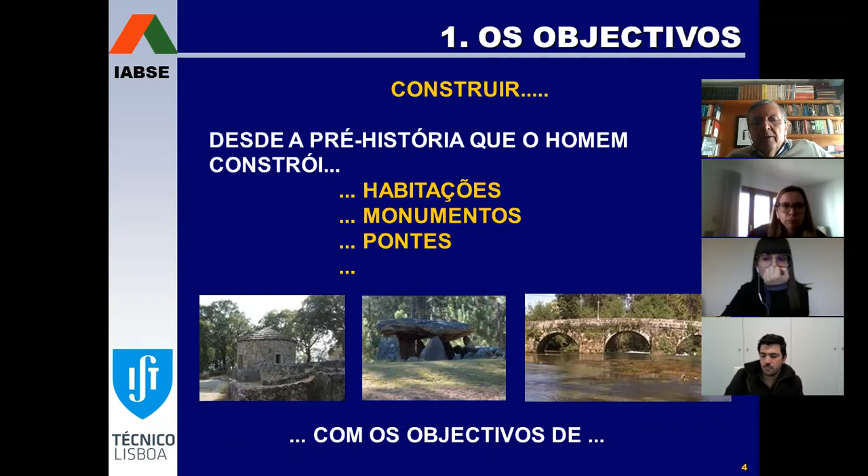All these things have, and it is important to have this concept, a target. When we do buildings, the target is to protect the persons, the family, from the environment. When we do bridges, the objective is to pass an obstacle, to pass a river or something like that.

We build roads to facilitate the movement of the persons. So the functional aspect of all our constructions is always the goal of the constructions.

Of course, to achieve these functional results, we need to have safe constructions. And what it means safe, it's buildings that can support the force of the winds, of the seisms, bridges that can support the loads that pass there. So the constructions need to be safe.

And besides that, they need to be durable. We like to have constructions that do not degrade with time. We need roads that support erosion, or monuments that are used and stay for eternity. So we already have these three main goals of construction: functionality, safety, and durability.

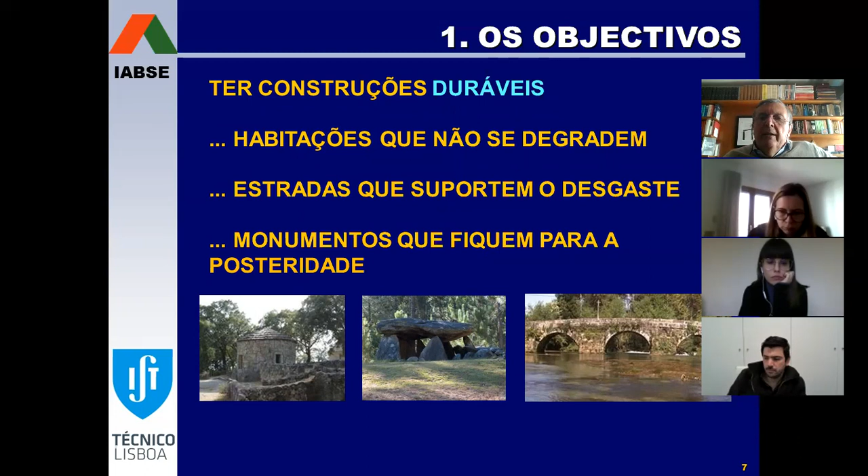And these are the main goals that we have since the beginning of construction. So how did we do this first construction? At the beginning, we only had basically three materials: the soil, basically the clay that was used in construction, the stone, and the wood, timber. And with these three materials, we built everything that was built until the 18th century.

Let's see a little bit more in detail. So soil or earth is the cheapest material that we have. It is a material that the strength is not very high, but it allows very easily to build in the form of compact earth or with bricks of earth.

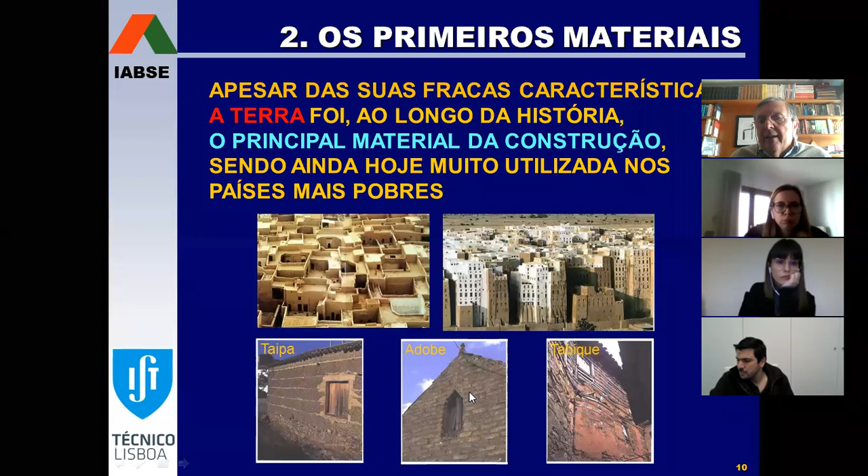And we can find it even today in different regions of the world, construction with earth. You see here buildings with several floors built with earth. What is the main characteristic of these constructions? The main characteristic is these constructions appear in places very dry, typical desert situations. Why? Because earth constructions with water, they disappear, they melt. So we can see these constructions only in dry countries. Even in Portugal, we only have this type of construction in the south of Portugal, mainly Alentejo, because it's the driest part of our country.

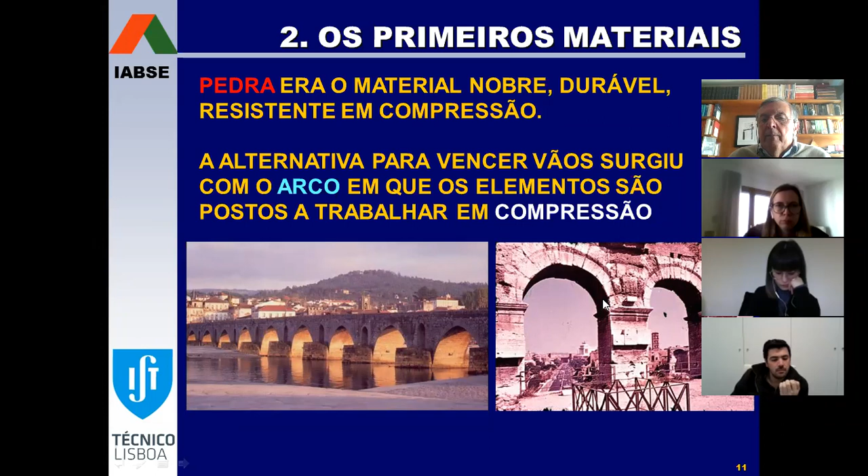Stone is, as I can say, a kind of better soil. Stone is a material with much higher strength, but it has a problem: in terms of tensile stresses it is weak. We can compress stone very strongly, but if we apply a tensile stress, it breaks very easily. So stone was used mostly in monuments because it's very durable, but until the arch solution was invented, stone was not so much used, because if you make a beam of stone, it more easily breaks.

Besides that, wood, I would say, was a material that was very much used, especially in the Eastern world, Asia and so on, but also in Europe. Contrary to stone or earth, wood works well in compression and in tensile stresses, so it was mostly used to make beams. It was, I would say, the most common material that was used in construction.

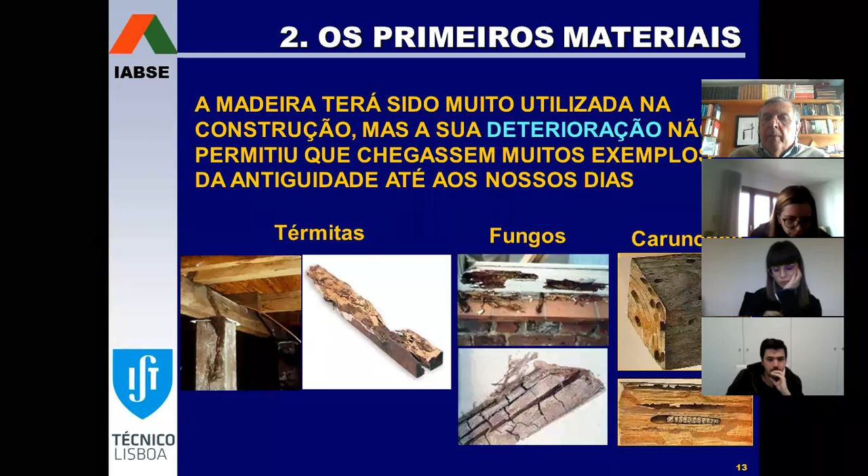Unfortunately, wood has severe deterioration problems related to insects, fungi, or even water. Water degrades wood very much. So most of the construction that was built with wood disappeared, and the old construction did not reach our present days. So now you know the objectives of construction, you know the materials that were used in the beginning, and now let us see the real constructions.

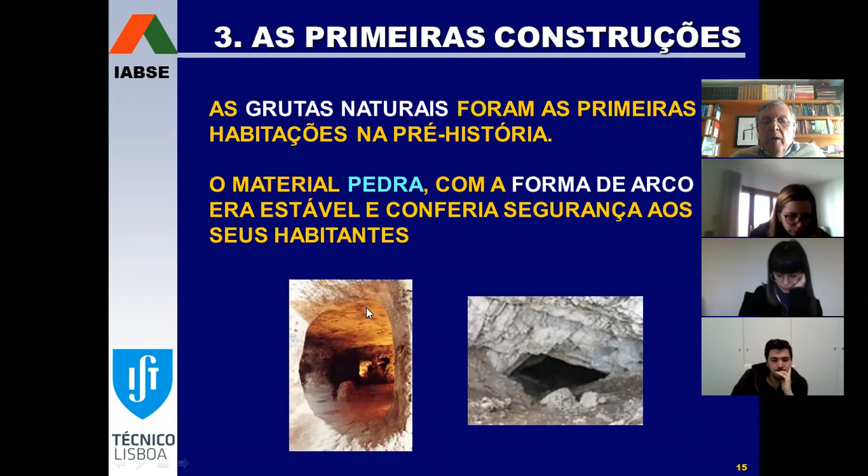The first constructions that appear are not real constructions, but caves. The caves were used, natural caves, so they are not really a construction of the human being. They were used to protect, as it was the easiest way to be protected from the environment. It was the utilization of caves, mostly in stone.

But the first building, or the oldest building that is known, was built in 9000 before Christ. It exists in the south of Turkey today. It's a special building because it's a temple. We are speaking of a period where human beings had no agriculture yet. Human beings lived mostly by hunting animals, and this concept of temple appears.

So the first constructions that we are aware of are basically temples. You see that the material used was stone, with elements related to the religion associated to that temple. As it was built in stone, we can still see it today, mostly 11,000 years after that.

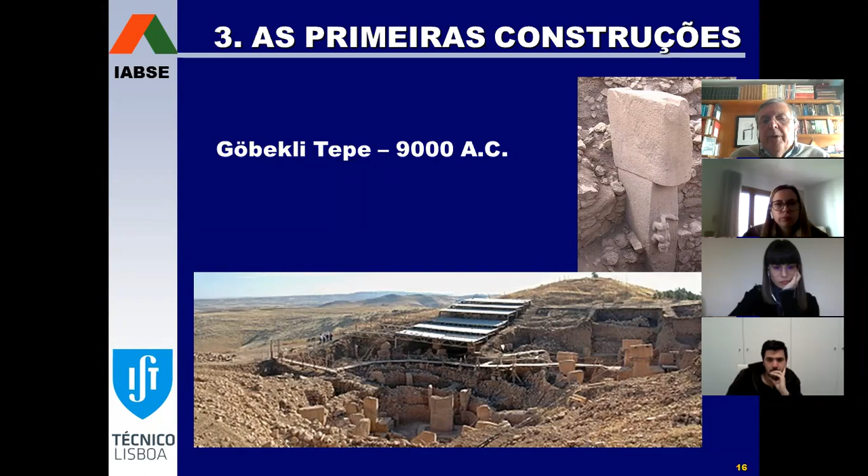9,000, yeah, 11,000 years. After this period appeared agriculture. Agriculture appeared around 4,000 years. So you see a difference between 9,000 and 4,000 - it's a lot of time.

And with agriculture appeared the concept of city or town. One of the oldest towns known is Uruk in Sumeria, present-day Iraq. We think that associated with the temples, in some places with the development of agriculture, people began to settle. It was easier to do agriculture than to run behind animals to hunt them, and people began to settle.

The appearance of a town or a city is quite a new concept, because in the period before, each family or each hunter had to do everything and find food for his family. When the town or city appears, we begin to see specialized professions. We have the shoemaker who just makes shoes, but he can exchange shoes for food. We have a group of people, each with their own profession, and the professions exchange materials, and all can survive.

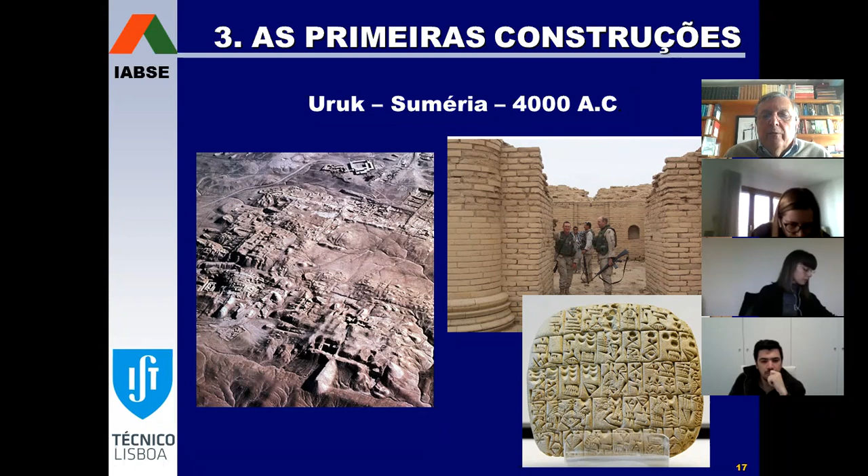Now, today they have special problems. As you know, Iraq is not a stable country, and unfortunately, these places are not easy to visit. It seems that the Pope is going there in the next days.

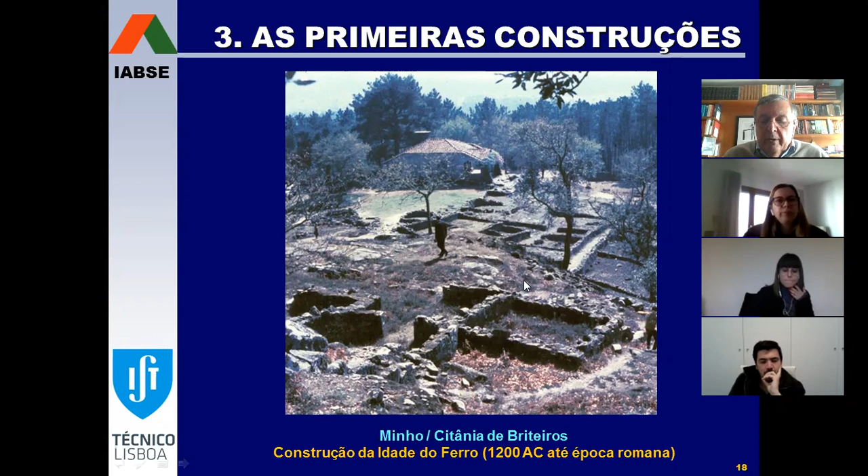So basically, with the appearance of towns or cities, the buildings, the small houses, were mostly built with stones in the walls. But when you reach the ceiling or the roof, you have to put beams, and for the beams you have to use wood. That's why mostly of these old constructions we only have walls, because they are in stone - the roofs disappeared. They were in wood, and with time they just disappeared.

The first civilization, a real civilization with a king power or a pharaoh power, is Egypt. If you think of Egypt, mostly you think of the pyramids. The pyramids are the tombs of the pharaoh kings. It's funny because the evolution of the pyramids involves the solution of some engineering problems. The first pyramid...

Let us say the step pyramid is the Saqqara pyramid, built by the pharaoh Djoser. It was a step pyramid - as you see here, it has several steps. Before this, typically the tombs were just a parallelepipedic tomb close to the soil. This pharaoh decided to make a bigger one, step by step.

The next pharaoh was Snefru. He decided to make a more uniform pyramid, and instead of steps, he tried to make a uniform pyramid. But he began, as you see here, building with this inclination, and suddenly he had a rupture of the foundations. Because, as you know, when you are at the beach with sand and try to make a small mound with sand, you know that the inclination has a maximum related to the friction of the soil grains, of sand grains.

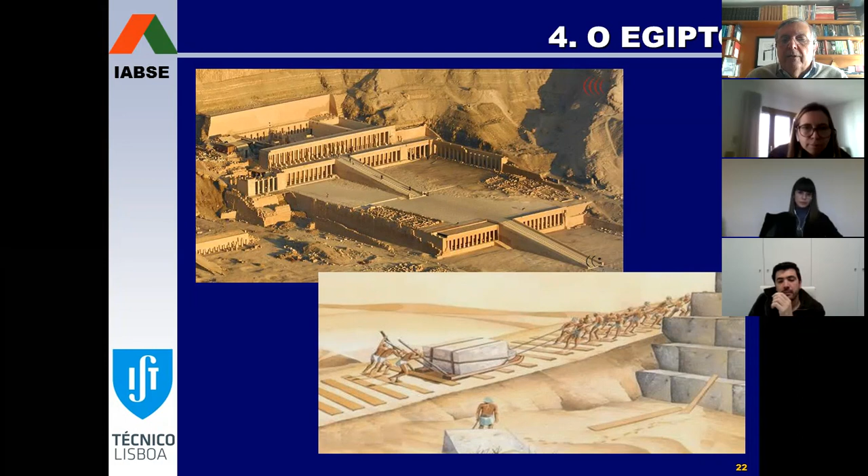The Egyptians that left all their temples, the temples that you know from Egypt, are of course all built in stone because it's a durable material, and they understood that. But as they did not use the arch for the temples, they used beams. You can see here that the beams were at a very small span. Compare the height of this guy, so this beam has a 2-3 meter span, because they knew that if the span was too large, the stone would not support it and the beam would break.

They also invented the columns. The columns, as you see, are built with several segments for construction, because it was impossible to place an element like this together all at once, so they placed it one over the other. At the end, they used these capitals that were very large, mostly because the beams that were used were very large. They also understood the problem with the soil, because the pressure of the column was higher.

And the pressure in the soil should be reduced. To reduce it, they enlarged these elements, so the force divided by a greater area reduced the stress in the soil. And so foundations were invented also by the Egyptians. Basically, in Egypt appear the basic elements of construction.

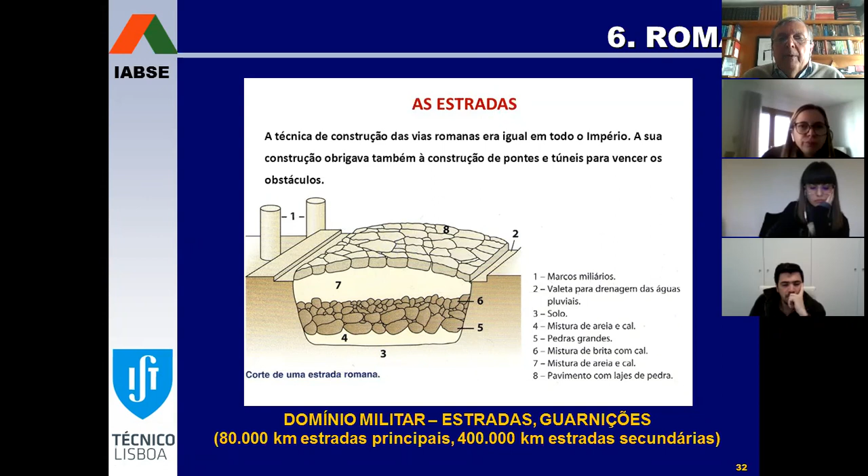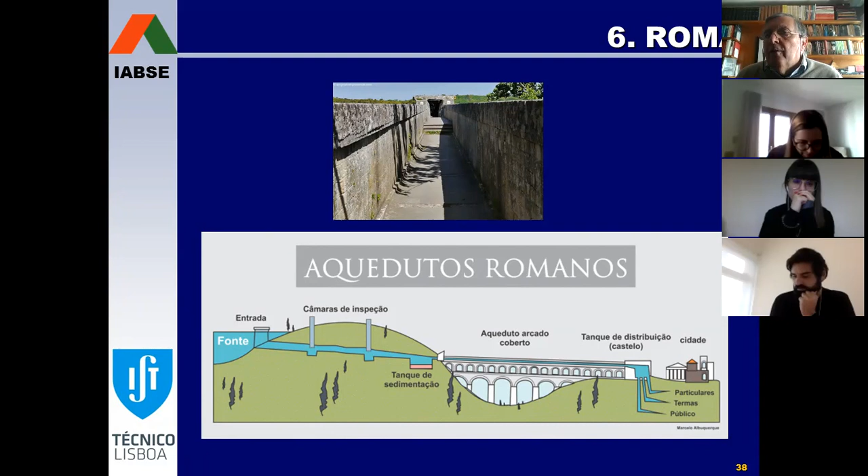In the towns they had pipes, lead pipes that were used for instance for gardens and even some houses. Lead is poison for people, and people taking in lead can become crazy. One theory associates the end of the Roman Empire with the existence of lead in the water supply. This theory arises because in corpses found in Pompeii, they found an elevated level of lead in the dead people there.

Another construction element from this time is the dome. The Romans were the first people to build a dome, and the dome is a more innovative construction than the arc, because in the dome you have a 3D composition of the elements. Remember that in an arc, when you build it, each stone has a smaller length on the interior part than the exterior part.

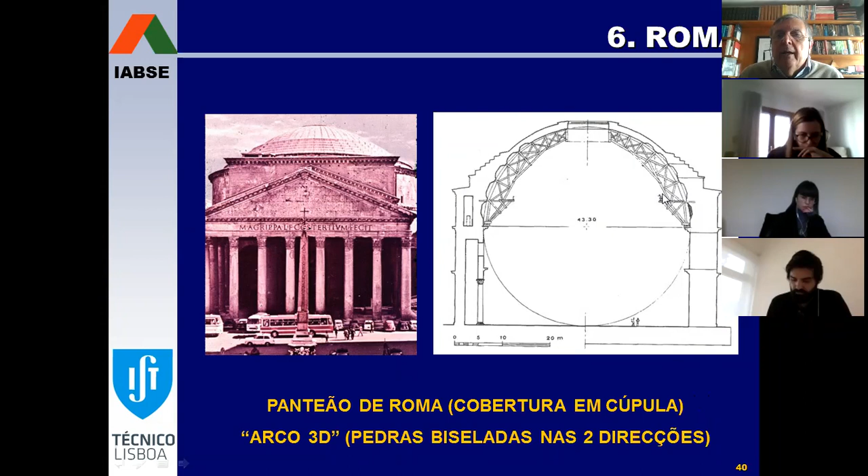In the dome, you have to do that in two dimensions, in the perimetral and in the longitudinal directions, so that they can all fit together. That is the problem of all these stones. But they were all glued with the mortar that they made, and you can still see this dome today in Rome. That is a magnificent construction.

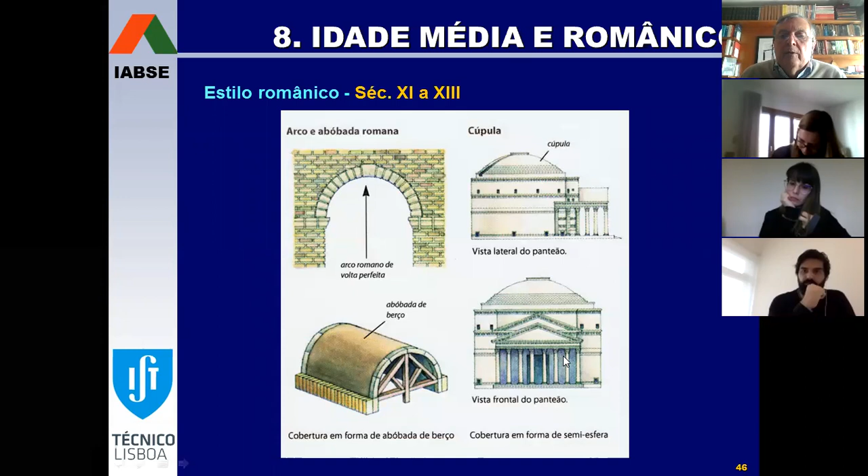So we have the typical spherical dome for the Muslims, and we have a medieval dome, a cylindrical one, in the Christian Western Middle Age. Basically, you see the typical Roman arc with that small support that led to the cylindrical dome used in the West, and the spherical dome later used mostly by the Muslim religion. After that, in terms of evolution, we reach around the 14th, 15th century the Gothic construction.

The Gothic construction is an evolution of the Romanic style.

Going back to see this construction, it's called the Romanic style. In this style, the arc, due to the pressure from above, exerts a horizontal force that tends to open the arc. To avoid this, the walls in these churches were very thick and strong, to absorb the impulse from the arcs above. That's why Romanic churches are very dark and don't have windows—adding windows would reduce the weight-bearing capacity of the walls, which needed to be thick to absorb those forces.

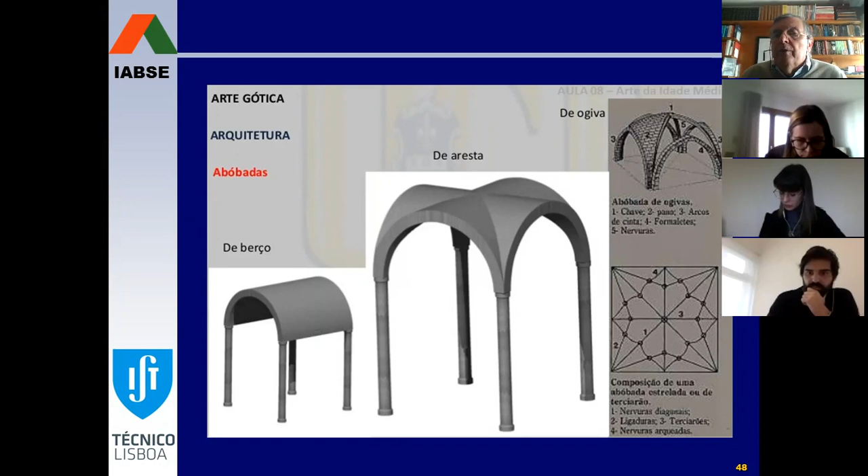When we reached the Gothic style, the conception was different. The dome was supported by small arc beams, and these small arc beams would lead the forces into columns. Also, the Gothic arc, instead of being circular like the Roman arc, has a height bigger than its width, so the forces that come from that arc are smaller.

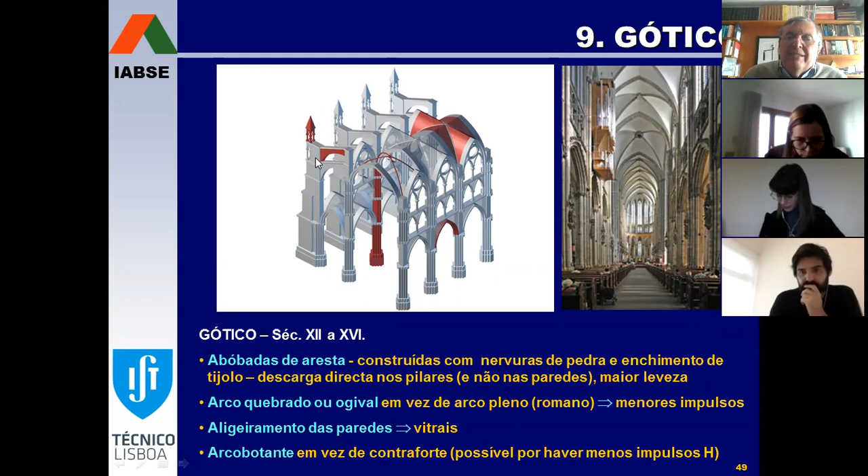This allowed the Gothic style of construction, where those arcs lead the forces to columns. This means the external walls are not as needed for weight-bearing, allowing more windows—that's why we have those beautiful stained glass windows. Even so, there are external forces from the arcs that need support, so they built reinforcing walls externally to the church to support these forces.

Basically, in Gothic construction, you have the Gothic arcs supported by columns here—this is the church itself. External to the church, you have these reinforcing walls that support the forces coming from the dome. This is a typical Gothic church.

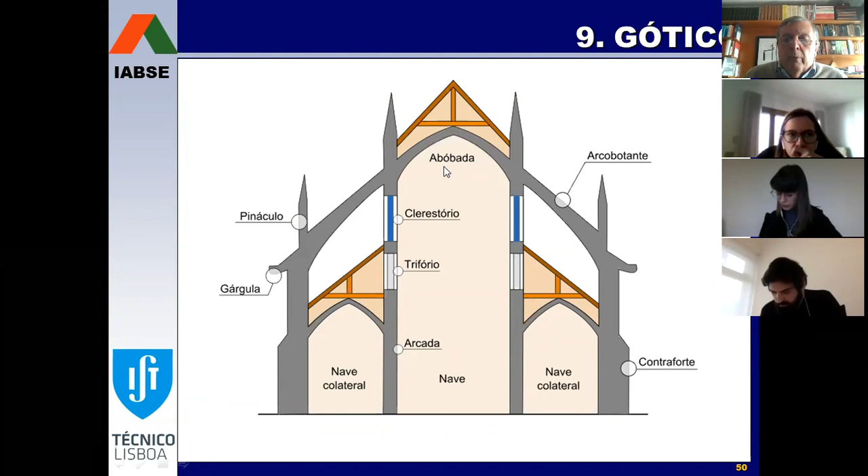This is Notre Dame de Paris, which, before the fire, looked like this—here are the buttresses that support the force coming from the interior. Speaking of Notre Dame de Paris, what burned was the wood ceiling above the stone dome. That's why there was no big collapse—except for a small zone, the stone dome supported the fire.

One funny thing about these Gothic churches: there was no structural analysis at that time, no specific design. The design was mostly done based on the experience of previous churches, and this knowledge passed from fathers to sons. The builders had secrets of construction and formed a special group of knowledge for building Gothic churches, called the Masonry, which led to present-day Masonry.

Modern Masonry has nothing to do with actual construction, but they still keep the symbols of construction elements, because the origin is related to the special secrets of building these churches.

After the 15th century, we enter the Renaissance, and one man appears who is considered the father of civil engineering. He's known in the world not for civil engineering, but for something else—his name is Galileo. Galileo became famous because he discovered it was the Earth going around the Sun, not the opposite as was said at the time. He entered into a discussion with the church, and the church exiled him, and he accepted.

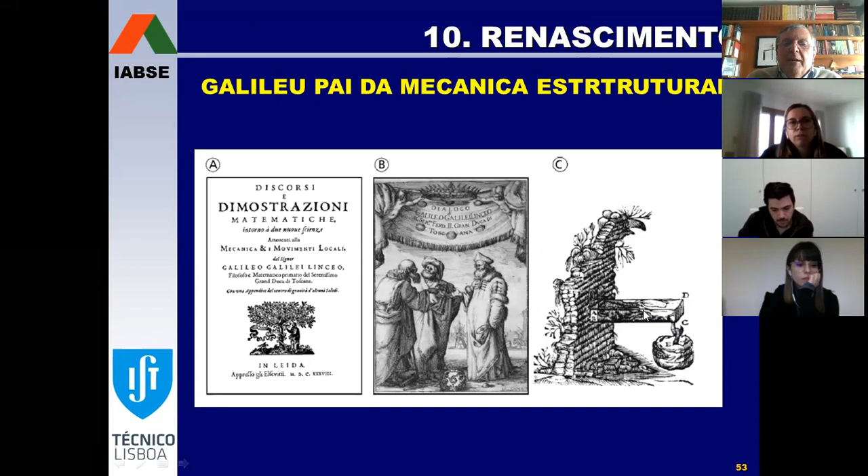At the end, he said, 'Okay, I don't agree, but I accept that it's the Sun moving around the Earth,' and he was exiled by the church. The church was afraid of his ideas and only allowed him to study problems related to construction. That's why Galileo began studying the behavior of beams—what causes a beam to collapse, and so on. So he's kind of the father of the beginning of studies in construction. These concepts began to be studied more deeply, and treatises on construction emerged with better understanding of material behavior. You can see that bridges began to have smaller, lower arcs, reflecting the increasing knowledge of this period.

One detail I always like to remember is the balconies.

Why is it so small? All balconies in stone are very small, because when you build a balcony, the stone acts as a cantilever, a beam in cantilever. As a cantilever, the tensile stress in the upper part is very weak for supporting those tensile stresses. So balconies in stone are typically very small.

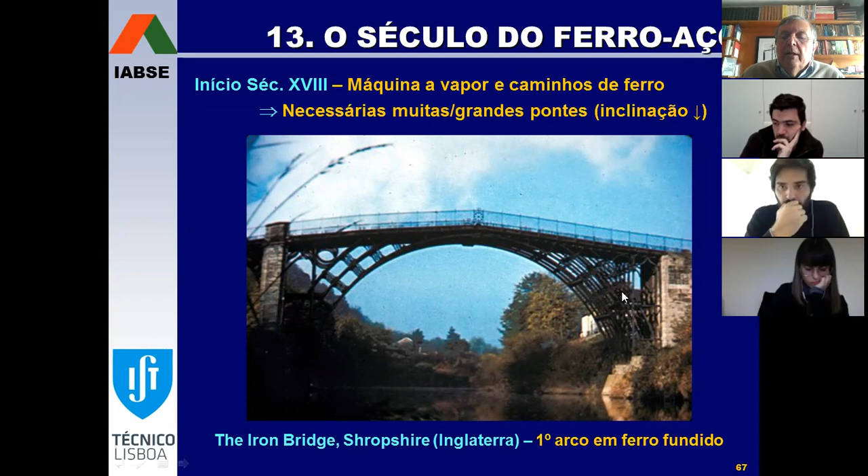As they understood that the problem with using iron was the temperature of burning the coal, they increased that further. After they got the wrought iron, that was, let's say, the beginning of steel, because the first iron had good compression stress, but in terms of tensile stress it was not so good. It was with the wrought iron that a material with good strength for construction first appeared.

That wrought iron was used for the first time in the Crystal Palace in London in 1850. All this material was built with wrought iron beams - not steel. It was what was used for the first time. They had to get this type of construction approved with this new material, and many tests were done to allow its construction.

The appearance of this material in practice led to the Industrial Revolution, because with this iron it was possible to have furnaces with much more strength. So we began to use the power of steam. Steam engines appear, and with steam engines appear trains. To use trains you need railways, and to have railways you need long bridges to pass the valleys.

This is precisely the beginning of civil engineers, because until then the concept of civil engineer did not exist. They were mostly military engineers, because the main constructions were to build fortresses for war and things like that. It is precisely with these new materials and with the railways that some military engineers decided to become civil engineers instead of military, and they founded in England the first association of civil engineers, dedicated mostly to the construction of railways.

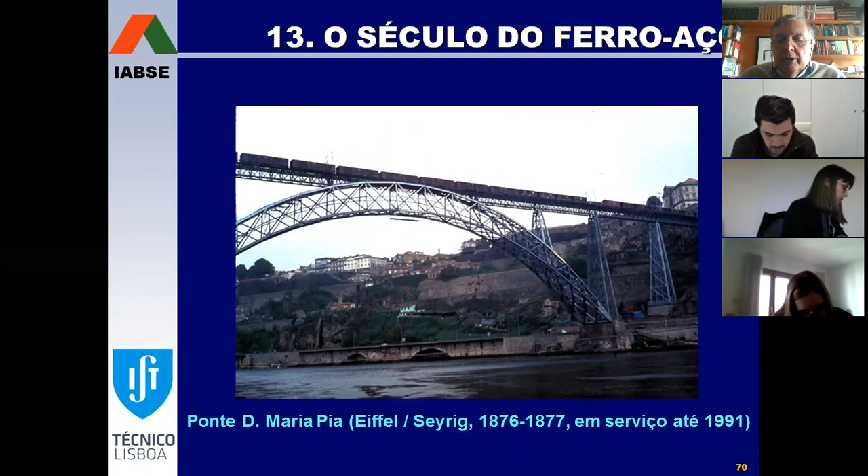Eiffel understood the problem and did several tests, and he understood that wind should be considered as a pressure on steel. He decided to do studies and proposed to build an arc bridge for the Douro River. This is the construction of the Maria Pia Bridge, which was at that time one of the biggest in the world, and he also had the advantage of developing a new construction system that did not require support of the arc before it was constructed, so it was supported from above.

Just a small comment: it was only after Eiffel built the Douro Bridge that the French allowed him to build bridges in France. The experience was done here in Portugal.

After steel, we reach the end of the 19th century, where a new material appears: concrete. Concrete is an artificial stone that has the problem of being good for compression but not good for tensile stress.

Legend says that one day a gardener, Joseph Monier, who was a specialist in building vases for plants in concrete, noticed that most of those vases would present cracks with the development of the plants. One day he decided to put a steel grid inside the concrete, and the vases never broke anymore. He patented that invention, and reinforced concrete appeared from a solution for vases.

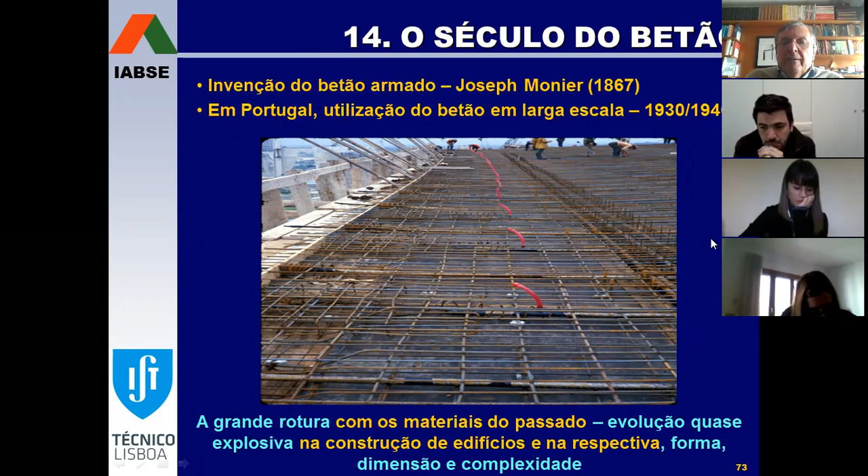That evolved and led to the most important constructions of the 20th century. Curiously, one of the things that prevented the earlier development of high-rise buildings was not a construction problem, but the development of the elevator, which appeared only in 1852. Only after that did we begin to have the construction of skyscrapers.

The present solution of buildings, where we have a structure with beams and columns and where the walls are no longer the strength part of the construction, appeared in 1892 with this guy, Hennebique.

It's funny, this guy had a material, basically a mortar, to protect steel construction from fire. What he did was go to steel structures and put mortar around them to protect the elements from fire. But he understood that the steel elements with mortar became very resistant, and he decided to build a building just with that. So it was steel beams with mortar around them, which is basically the concept of reinforced concrete. He began to build with that, and it became the classical construction we use today with what we call column and beam structures, or frame structures.

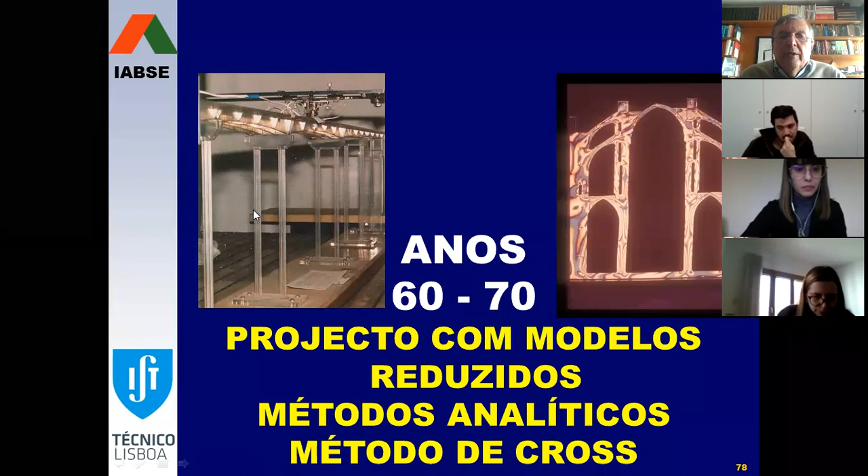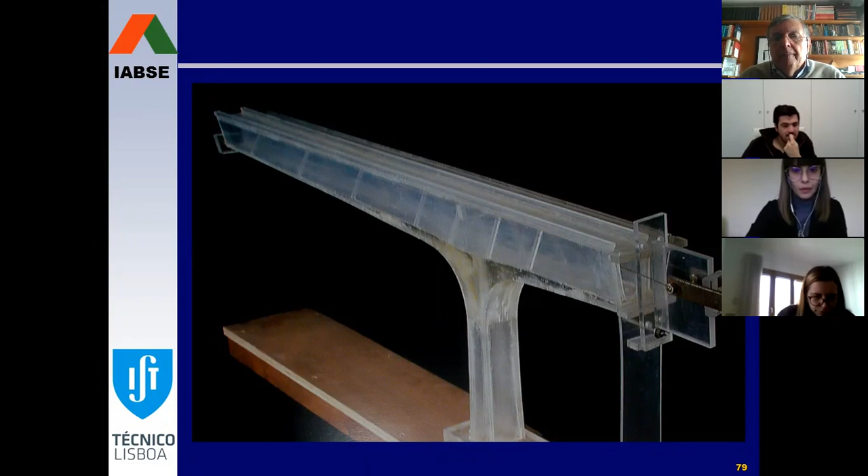You can see here, for instance, a model for the São João Bridge, the railway bridge in Porto. This one at the time had a span of 250 meters, the biggest in the world in terms of railway bridges. This technique was developed by a famous university professor, Edgar Cardoso, a bridge professor who built several bridges, some of them world records, based on designs using models with techniques he developed.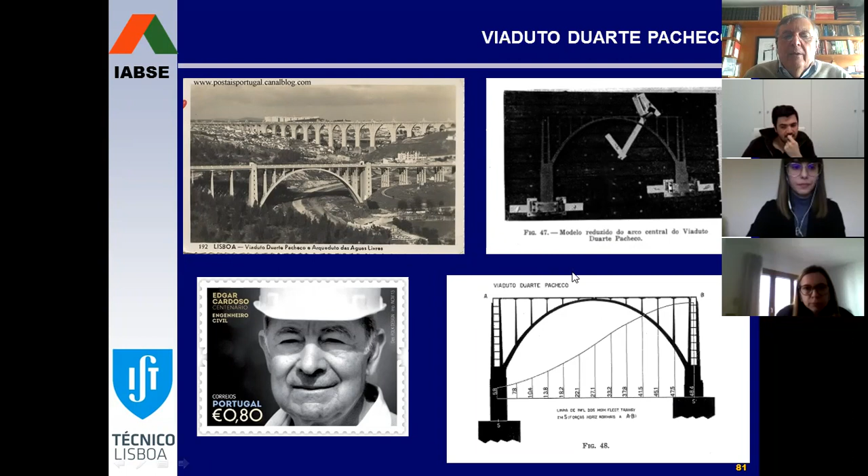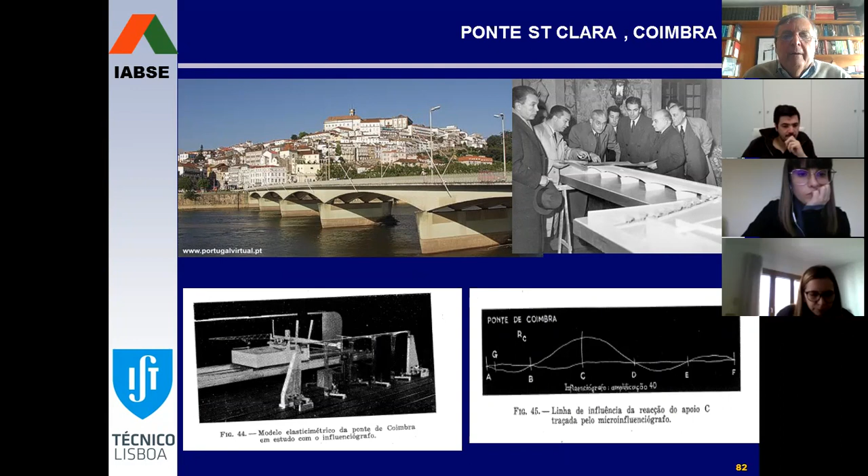Here are some elements; we still have some of these in our museum here at IST, which you can go and see. But after that we had what we called the informatic Big Bang. Computers began to appear, first in our national laboratory. The first bridge designed, even slightly, with computers using finite elements was the 25th of April Bridge. And IST had its first computer in the 70s.

The first calculator, the simplified calculator with 4 operations, appeared in 1973. We began to teach finite element methods in 1976. And the first SAP, the great-grandfather of SAP 2000 or whatever you use today, appeared in 1978. With that, we already began to design the same São João Bridge that Professor Cardoso designed with a physical model.

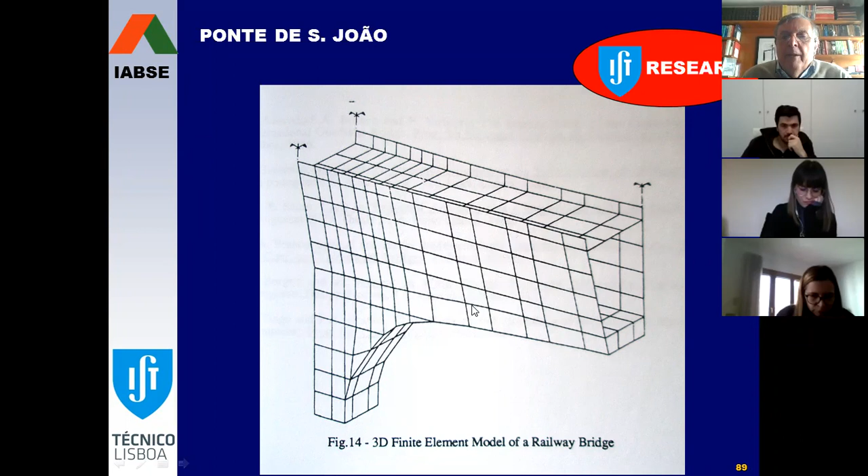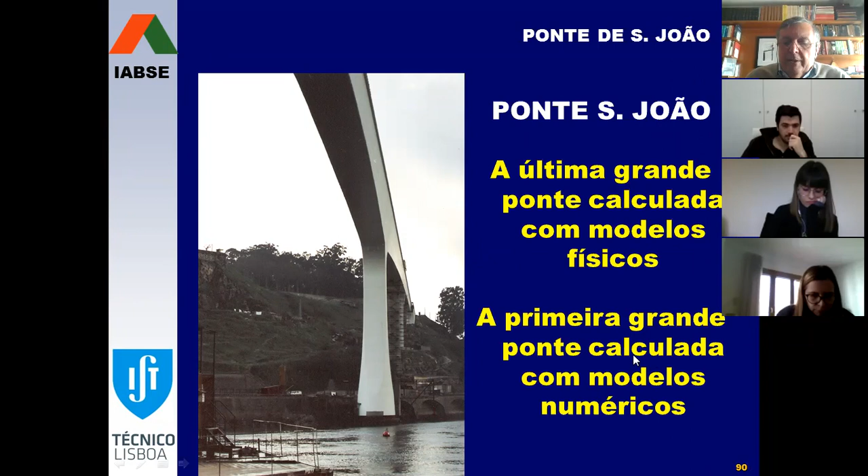It was, for the first time, studied in parallel with the finite element method. That's why I show this bridge, because it was the last great bridge designed with physical models, but it was also the first great bridge designed with numerical models.

Since then, the first PCs appeared in 1985, and the first seismic design of our cable-stayed bridge using computer design was done in 1986. These are the two bridges in the south, in the Algarve.

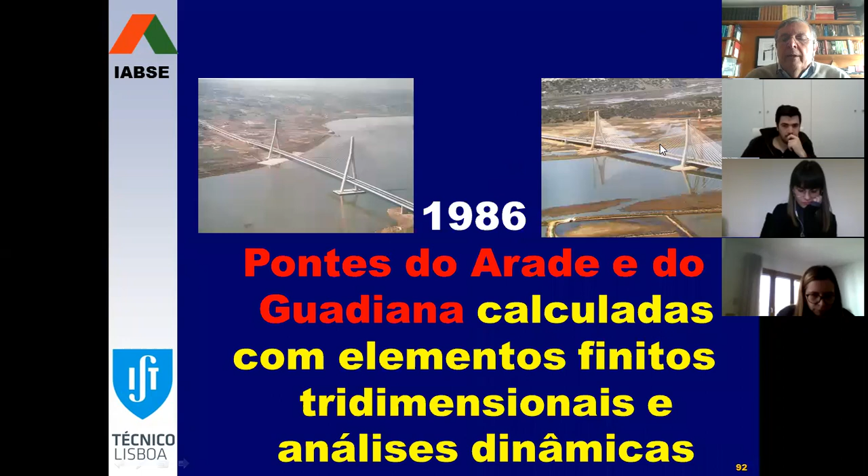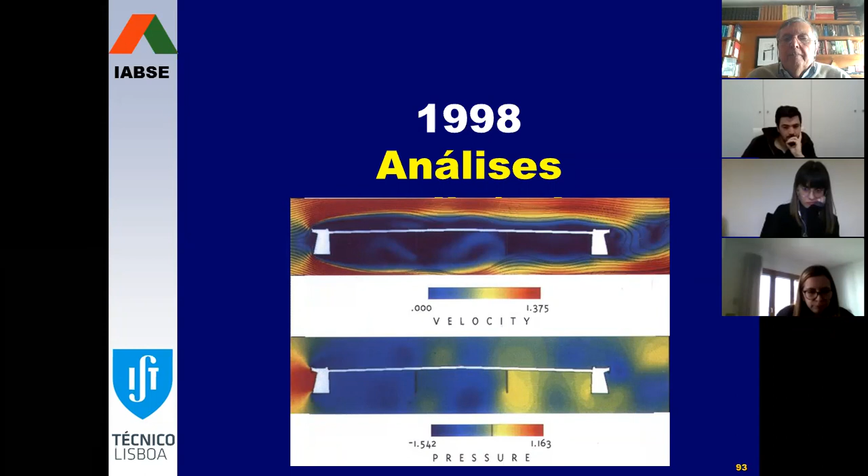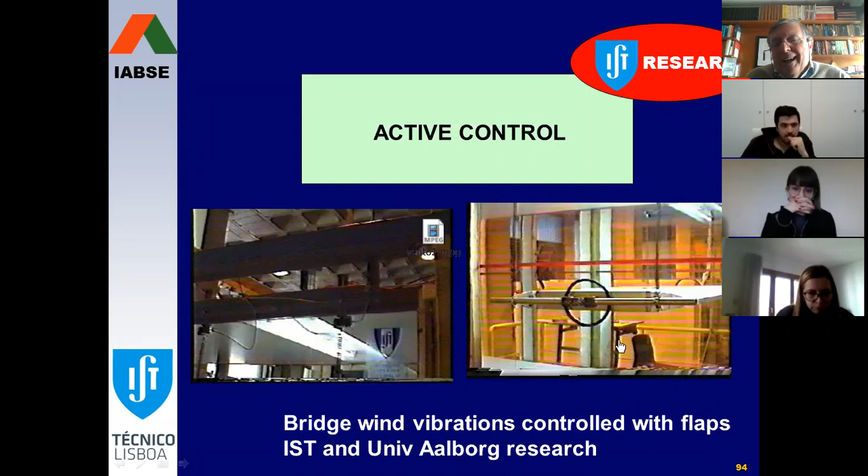And most recently, in 1998, we already have design using fluid dynamics. This is for the Vasco da Gama bridge. We began to do that with tests in active control, because wind is still the area where experimental tests are still needed, as computer models are not yet efficient enough.

And what about the future? The future is, as always, three words, as in the Olympics: higher, longer, and stronger. These are the three main words for a civil engineer.

Higher: presently we have the Burj Tower at 800 meters, built in 2008. Under construction is a tower in Saudi Arabia at 1,000 meters. It seems the main problem is money, so construction is stopped. I don't know if it will finish.

Longer: the longest bridge span that we have is almost 2 kilometers main span, a Japanese bridge. And stronger: we begin to have composite materials.

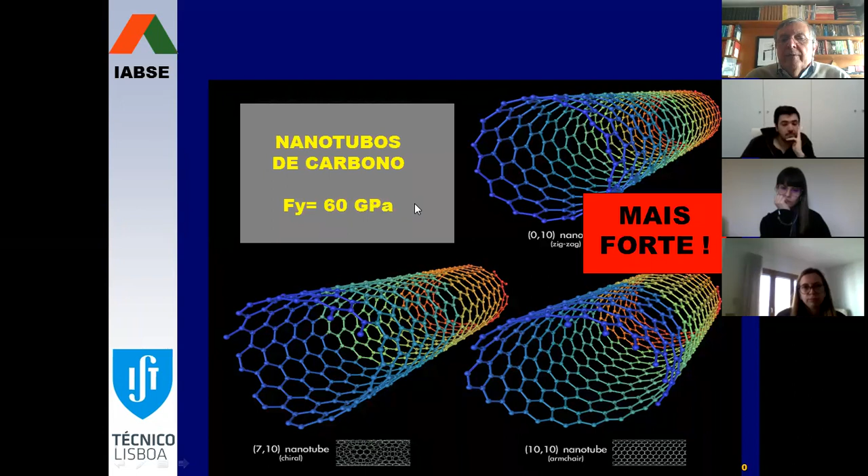We speak about carbon fiber nanotubes with a strength of 60 gigapascals. This is what is leading the change related to new materials.

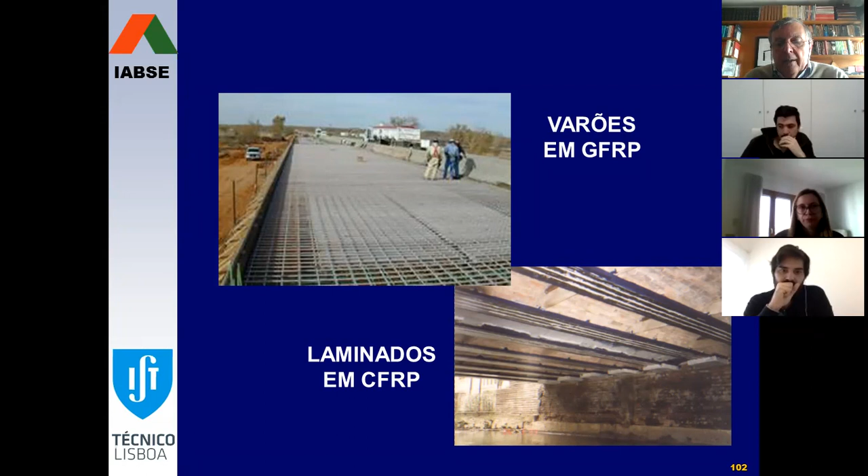We begin to see now new materials. Remember that we built all our civilization with three materials. After that we had steel and concrete, and only now new materials begin to appear. We begin to have composites.

Here are some examples, bridges where we already begin to see their use. We begin to see new construction techniques, for instance precast tunnels underwater, and equipment for movements with high capacities.

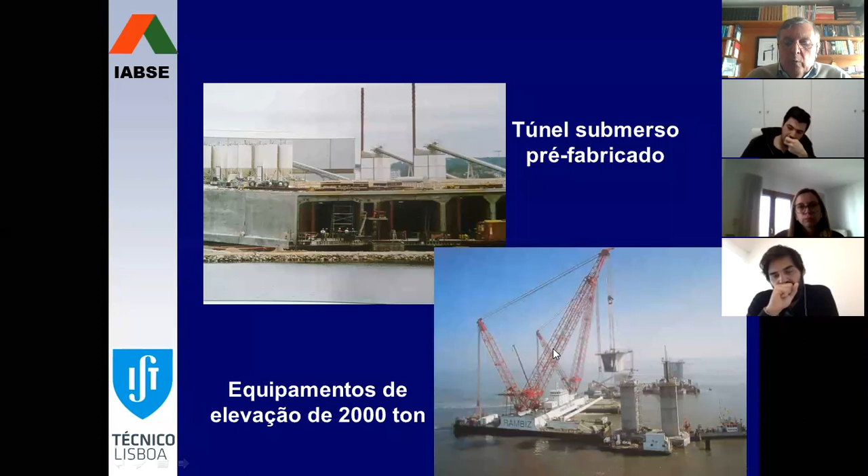Just to finish these evolutions, I'm going a little bit back, and I'm going to travel now with you along Lisbon, because here you can still walk in the street, which is not what we can do in our present days. I call your attention to some of the buildings, because Lisbon has a particularity: it has buildings from the old ages till the present ages.

We can see the evolution of building construction in almost all the streets. Basically, we have five typical constructions. We have constructions before 1755, what we can call Middle Age construction, and we have Roman constructions. There is even a website you can look at, about Roman Lisbon, where you can see the several Roman monuments, and several examples from Middle Age till Roman construction.

This date, 1755, is when we had a big earthquake, and after that big earthquake, construction changed. We have a construction related to that period of reconstruction, called the Pombalina construction, because Pombal was the first minister that organized that construction.

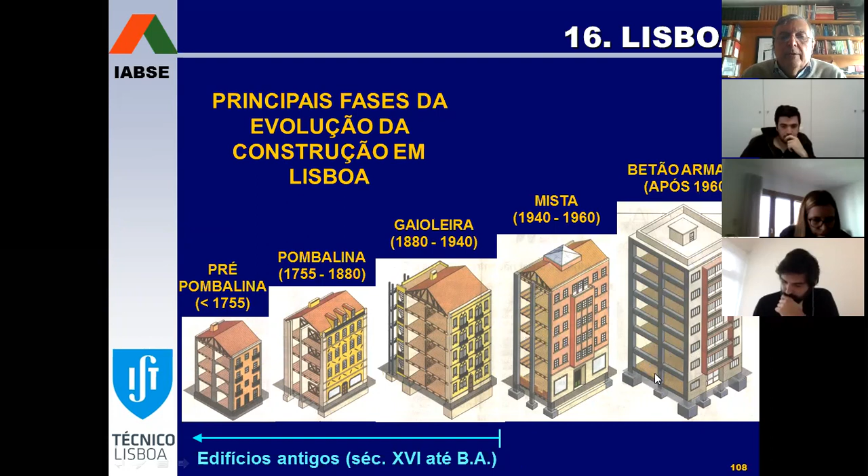Just to have an idea, the medieval construction before 1755 appears around the castle in the Alfama regions. These are small houses with irregular architecture, basically walls in stone, sometimes poor stone. The floors are usually wood construction.

Sometimes as a basic element we have some stone arches for some spans, but basically it's poor stone, mostly soil and stone and bricks, a mixture, what we call masonry, plus wood construction. This is a very irregular construction without any special provision to support lateral loads or whatever. In 1755, Lisbon had the earthquake.

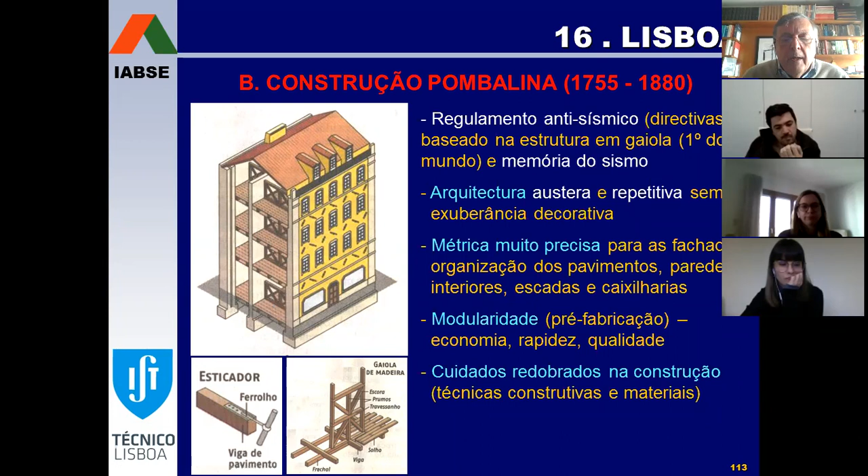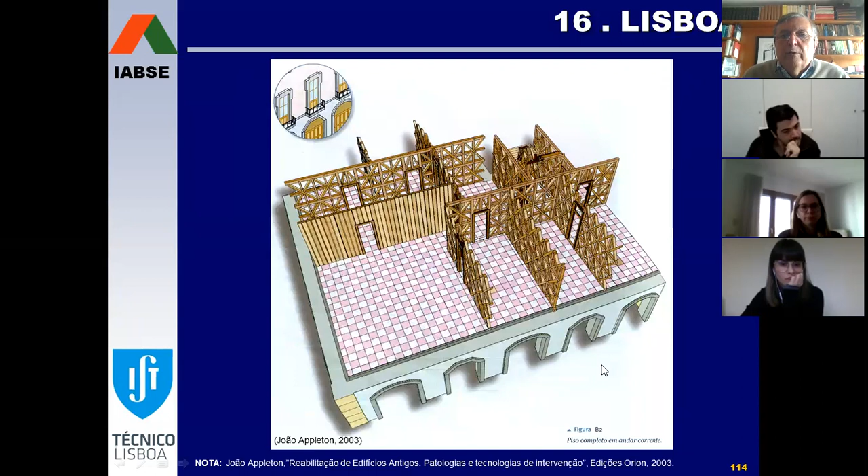This was the new concept that was used, and you still can find it in some of the buildings in the lower part of Lisbon. You can see the concept: all the internal walls were made of wooden trusses interconnecting the external walls, making a kind of box that could support the earthquakes.

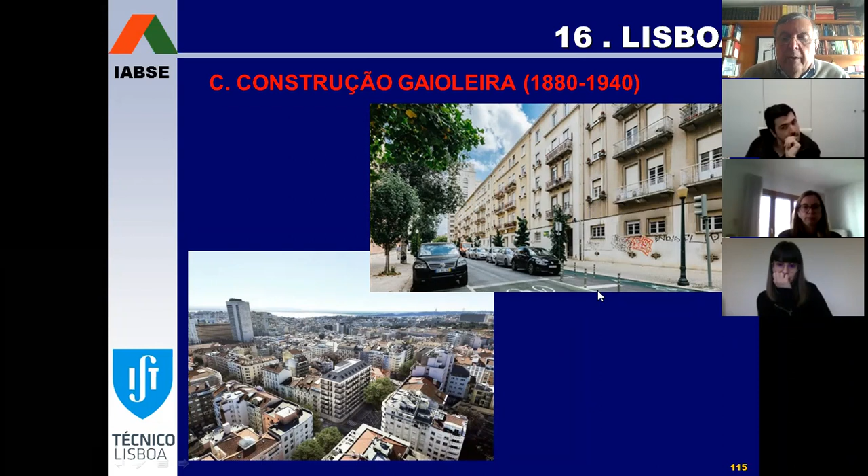After that, to build these wooden trusses was a bit complicated and expensive. Construction began to be done without those trusses, and a more simplified kind of construction appeared. You can see here many buildings, especially in the zone close to the university, where you see the balconies. They have small balconies, meaning the floors are in wood. Basically they did similar construction, but without those reinforcing facades.

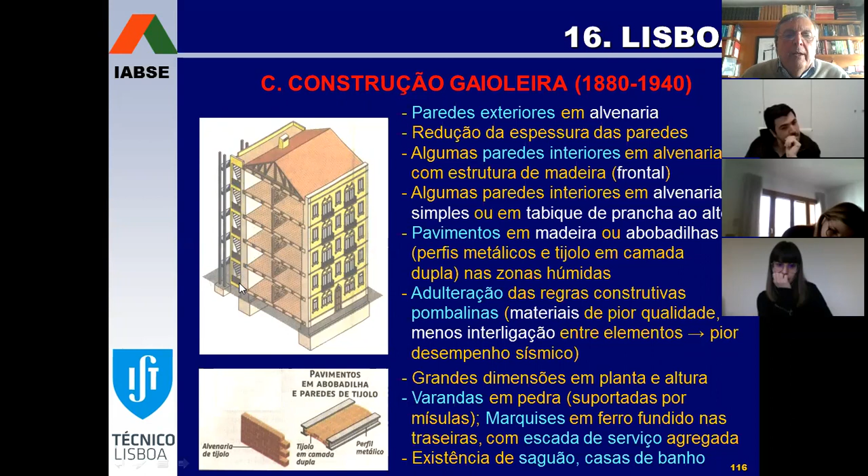Besides that, as fire was also another problem, they began to have safe stairs behind, and iron began to appear there. The main problem of these buildings, and this occurs with some frequency, is that the construction is basically just the walls and wooden floors. When you sometimes demolish a building connected to this one, if you have a small soil settlement, there is no capacity to support that settlement, and they collapse. Mostly they don't collapse, but they have severe cracks and so on.

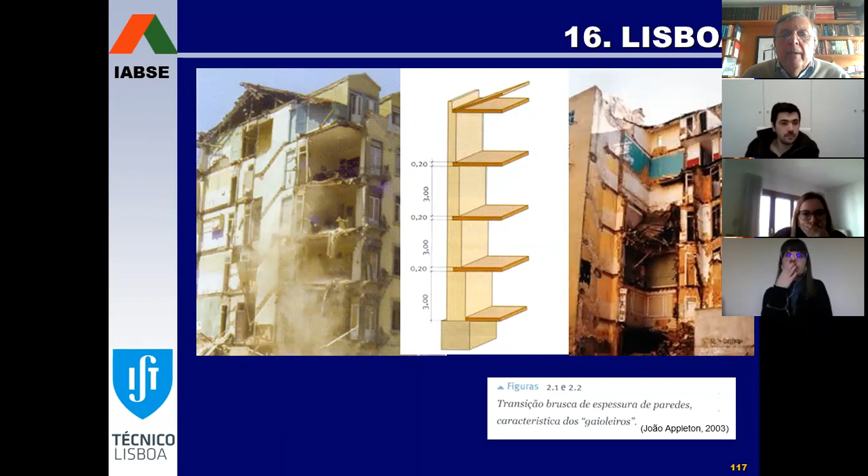This is the area of Lisbon where we have today more problems in terms of construction, let's say. These buildings begin to have the introduction of iron construction. You can see here it was used mostly in the external part, mostly to support the toilets, because they understood that toilets on a wooden floor would frequently lead to collapse, since the wood could not support the water and would lead to collapse. So they began to put the toilets external to the buildings.

In these structures, for some reason, when concrete appears around 40-60, it begins to be used only for the floors of toilets and kitchens, because those are the wet parts of the construction. But suddenly they understood it was much easier to build the whole floor in concrete. So we have this type of building where the walls still have strength to support the floors. The walls are still in masonry, but the floors are already in concrete.

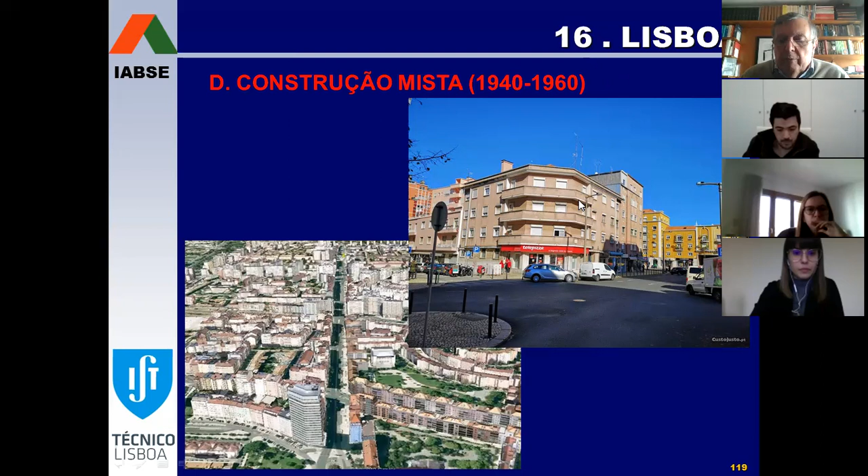That is called mixed construction, because you have walls in masonry and already floors in reinforced concrete. Here you see that with concrete floors, the balconies begin to be larger, precisely because you already have concrete balconies. You have here the solution where reinforced concrete is put in the floors.

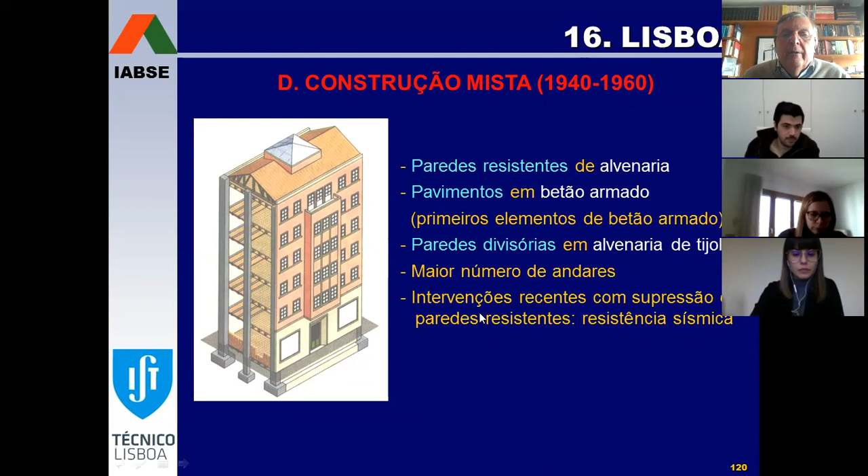And finally, we reach the present construction, the frame construction with beams and columns in concrete, where the walls are no longer an element of resistance but are more for protection inside. The university is here, and this evolution is very much seen around the Roma Avenue, because it begins with some wooden floors, then you have some mixed construction, and at the end you have these buildings that are the present situation. So these are the buildings you learn how to design, but it's good to know there are all the other types of buildings you may face when doing rehabilitation, and understand their complete concept of solution.

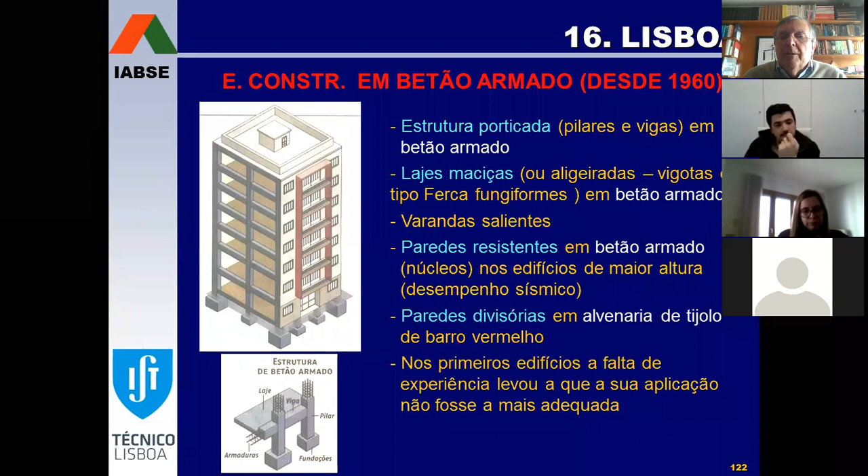And that's all. Thank you for being here for 1.5 hours. I don't know if you have any questions.